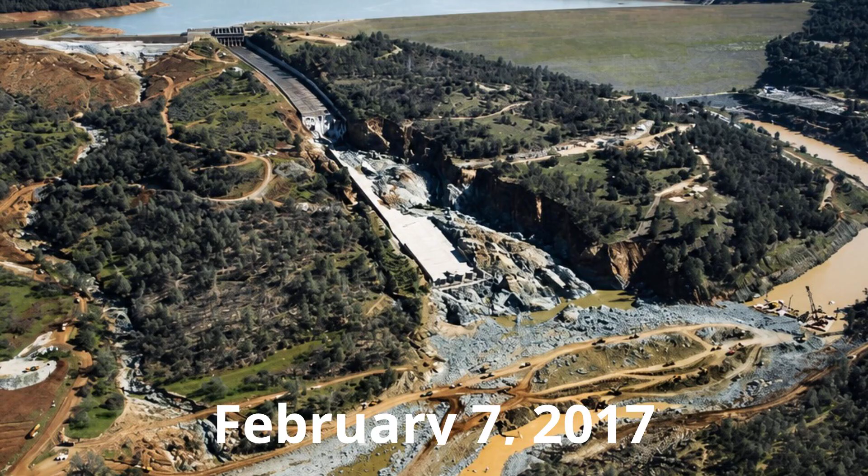February 7th, 2017, Oroville Dam, California. The tallest dam in the country is releasing water down its main spillway, exactly as designed, and the concrete tears itself apart. Not from age, not from neglect, from doing its job. 4 days later, an emergency spillway, never used once in 50 years, gets tested for the first time and starts eroding too. 188,000 people get told to leave immediately.

6 years and $1.1 billion later, engineers reopen that same spillway and call the release small. If it's fixed, why are they still this careful? I look at spillway failures and forensic reports for a living, and I want to be precise here, because the physics matters more than the panic. This wasn't a random storm breaking a dam. This was a 50-year-old design finally meeting the exact conditions it was never built to survive, and the water simply told the truth about it.

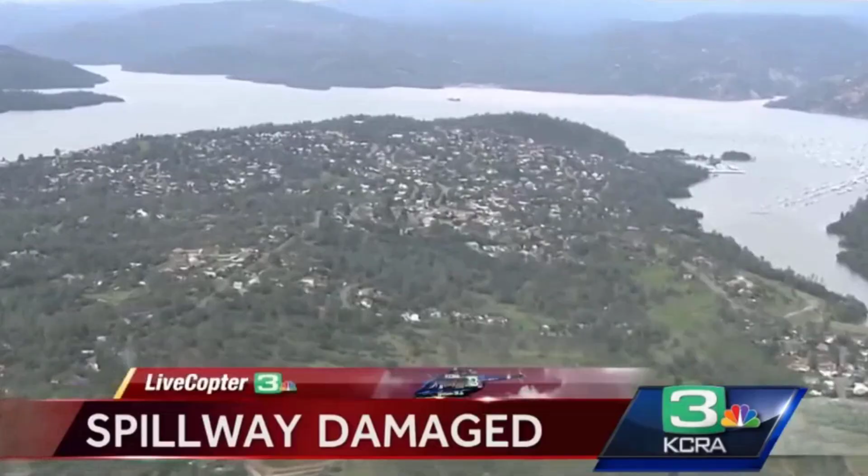Let's get the scale of this reservoir straight first, because the numbers only mean something once you understand what they're sitting on top of. Lake Oroville isn't a small local pond behind a levee. It's a working piece of the California State Water Project, and downstream from that dam sit families, farmland, fisheries, and drinking water infrastructure that stretches far beyond Butte County.

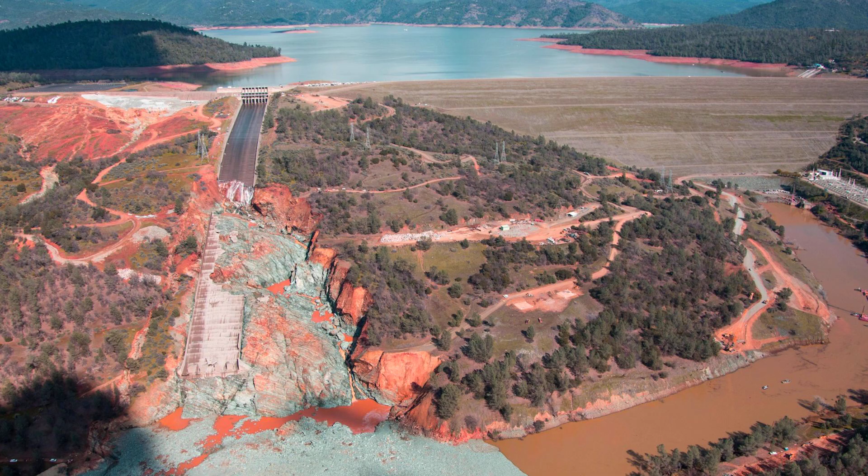When people picture a dam failing, they picture a wall breaking. That's not what happened here, and honestly, that's what makes this case more interesting, not less. The wall didn't break. The systems built to control what the wall releases broke, and that distinction is the entire story. Here's the part that bothers me professionally.

The official narrative that circulated in 2017 was simple. Unprecedented rain, overwhelmed reservoir, infrastructure did its best under extreme pressure. That's not false. It's just not the whole story, and the difference matters because "the storm was extreme" and "the storm exposed a preventable weakness" are two completely different conclusions with two completely different lessons.

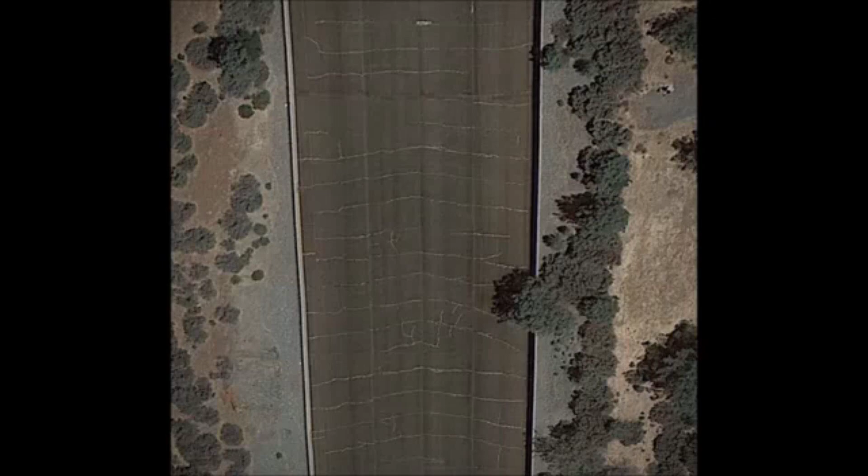In January 2018, a 6-person independent forensic team, put together at the demand of the Federal Energy Regulatory Commission, finished a 9-month investigation and released a 584-page report. I want you to sit with that number for a second. 584 pages to explain a concrete chute failing. That's not the length of a document explaining bad luck. That's the length of a document explaining a system.

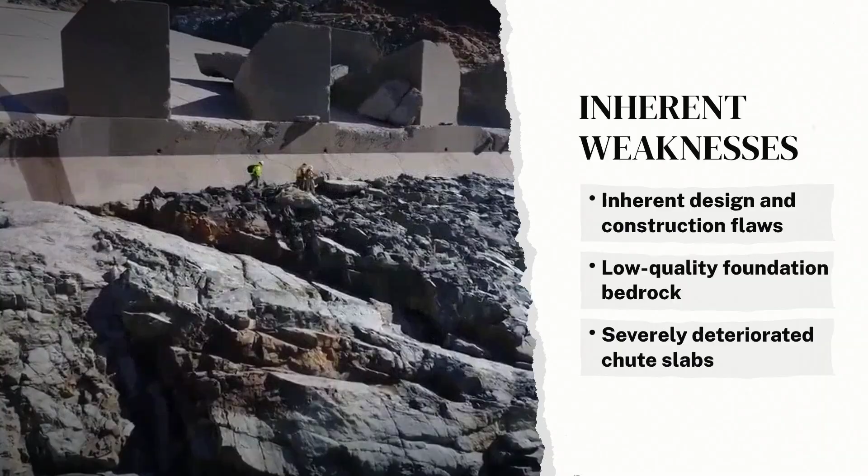Their conclusion, and I'm going to say this exactly the way they framed it: the incident was caused by a long-term systemic failure of the Department of Water Resources, regulators, and general industry practice to recognize and address inherent spillway design and construction weaknesses, poor bedrock quality, and deteriorated chute conditions. Read that again. Not an unforeseeable event, not an act of God. A failure to recognize weaknesses that already existed. That sentence is doing a lot of quiet, uncomfortable work.

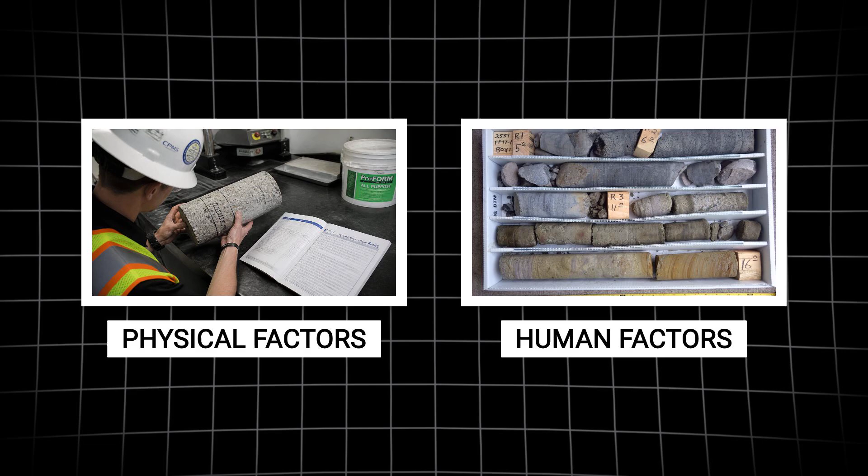Here's something else about that investigation that I think gets skipped over. This was actually the first major dam incident investigation where human factors were given the same weight as physical factors. Not an afterthought, not a paragraph at the end blaming operators, equal footing with the concrete and the bedrock. That's a meaningful choice by investigators because it means the final report isn't just a structural autopsy. It's also asking who looked at this spillway over 50 years, what they saw, and what they decided to do about it.

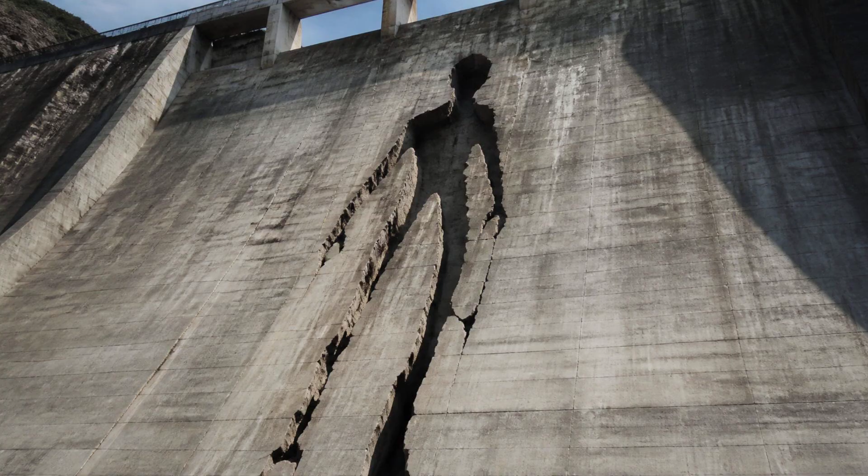When a forensic team puts human decision-making on the same level as material failure, they're telling you the failure wasn't purely physical. It was also a failure of judgment, repeated over decades by different people who each had a reasonable excuse in the moment. Okay, here's where the actual mechanism gets interesting, because this is where people usually check out, and this is exactly the part they shouldn't skip.

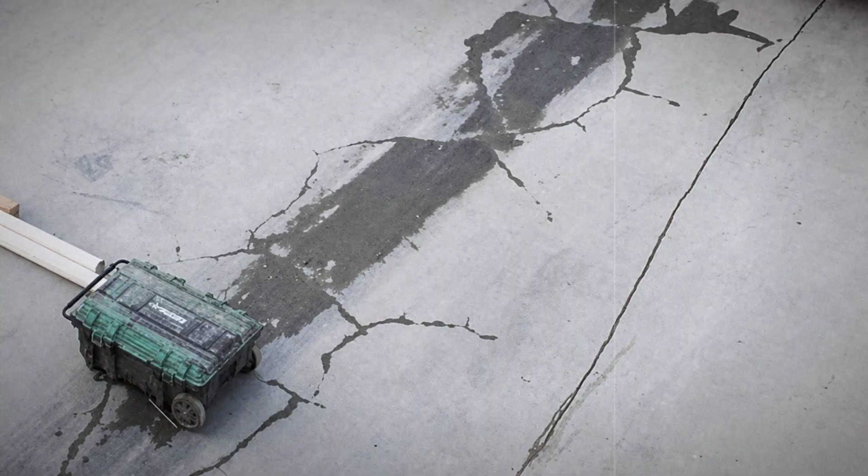The main spillway is a long concrete chute, built in sections, sitting on rock. Water runs down it fast. Under that concrete, there are cracks and joints, because there are always cracks and joints over 50 years. Water finds those cracks. It gets underneath the slab, and once water is trapped under a slab that's under enormous downward pressure from water rushing on top of it, you get uplift.

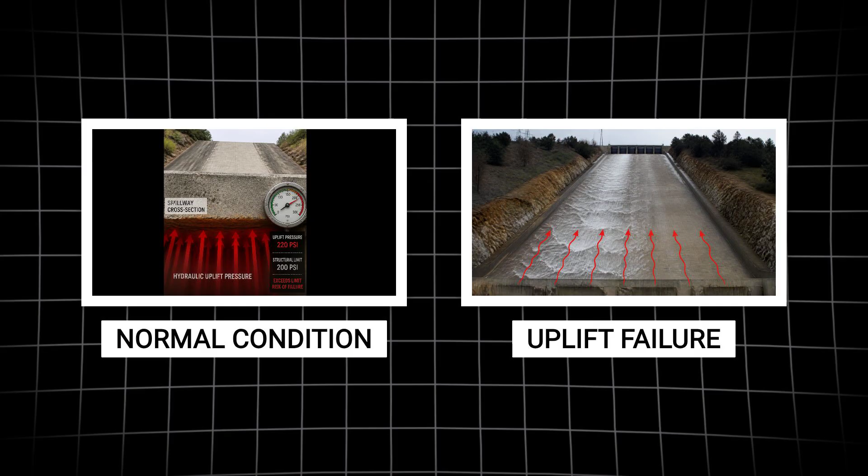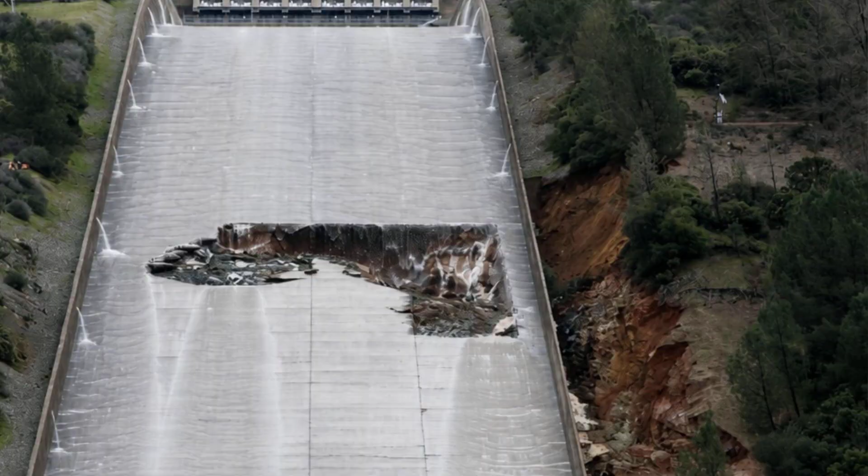The pressure pushing up from underneath can exceed the structural strength of the concrete holding it down. That's not corrosion. That's not erosion in the way people picture erosion. That's hydraulic force finding the one place the design didn't account for, and winning. Here's why that detail is not trivia.

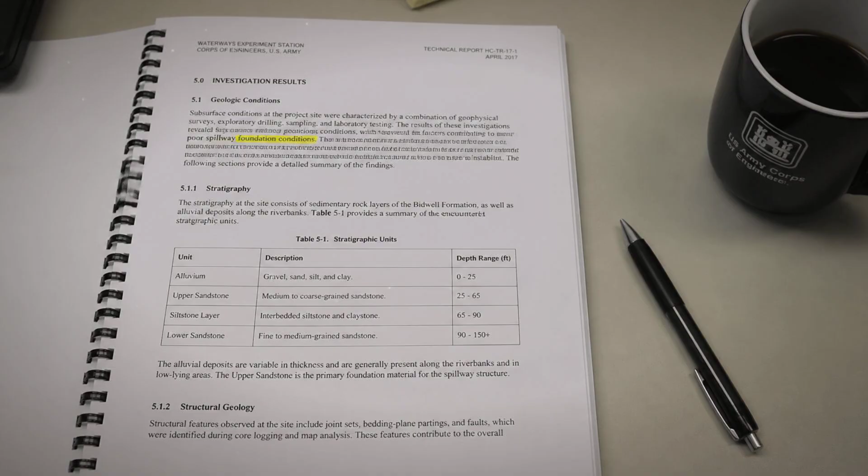Once that slab lifted, on February 7th, 2017, it exposed the rock underneath directly to the full force of the water, and the rock underneath wasn't good rock. The forensic team's language was poor spillway foundation conditions in some locations. That's a phrase built to sound clinical. What it actually means is that the ground this multi-million-dollar concrete structure was anchored into was never strong enough to handle what happened when the concrete above it failed.

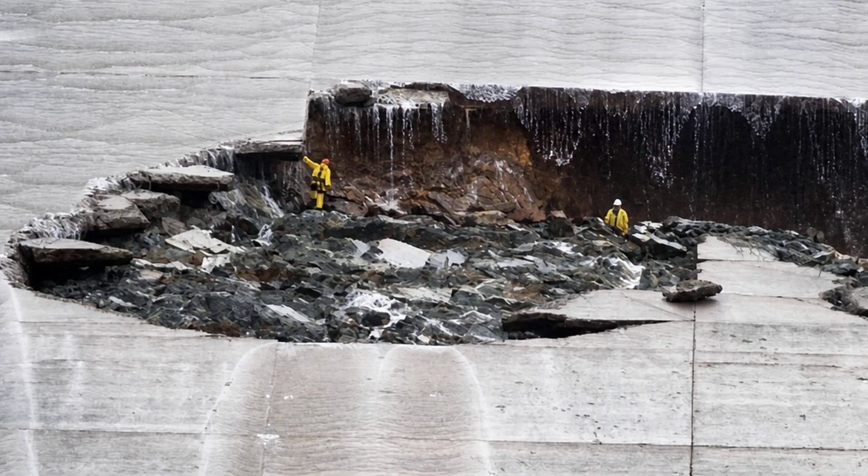The slab didn't just crack, it tore off, and it took the ground with it. And that missing ground caused more slabs to tear off. And the hole kept growing while the dam kept releasing water because it had nowhere else to send it. Picture that for a second, because this is not an abstract engineering event. You've got a chute the length of several football fields, angled steeply downhill, with tens of thousands of cubic feet of water per second thundering down it.

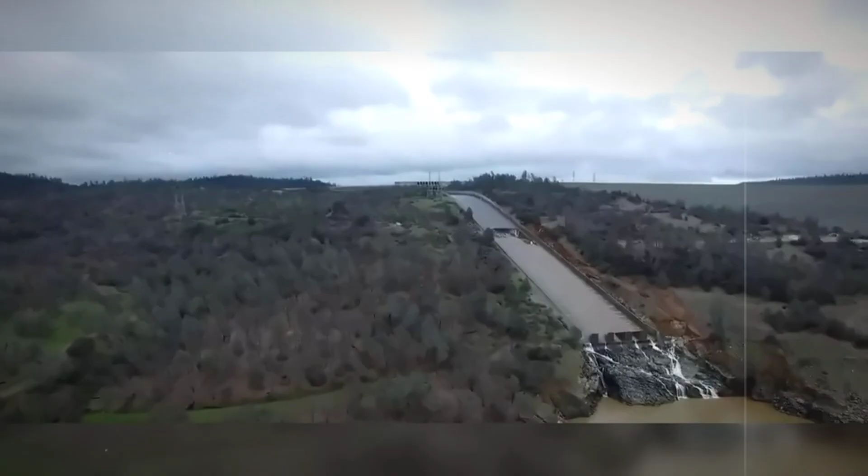Then, mid-release, a section of that concrete lifts off the ground like a manhole cover popping under pressure, and instead of smooth engineered chute underneath, there's raw exposed rock that was never meant to take a direct hit from that volume of moving water. Once that rock starts eroding, you don't get a small pothole. You get a crater growing in real time, underneath a structure that's still actively passing tens of thousands of cubic feet of water every second, because you can't just switch a flood control spillway off mid-storm.

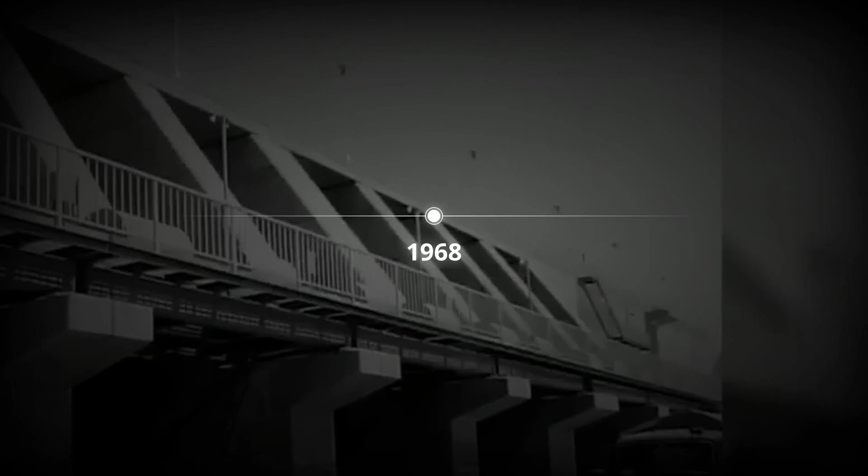I want to be fair here. Nobody in 1968, when this dam was finishing construction, was being careless on purpose. But a half-century gap between "we built this" and "this failed" is exactly the kind of gap where warning signs get buried in paperwork nobody reopens.

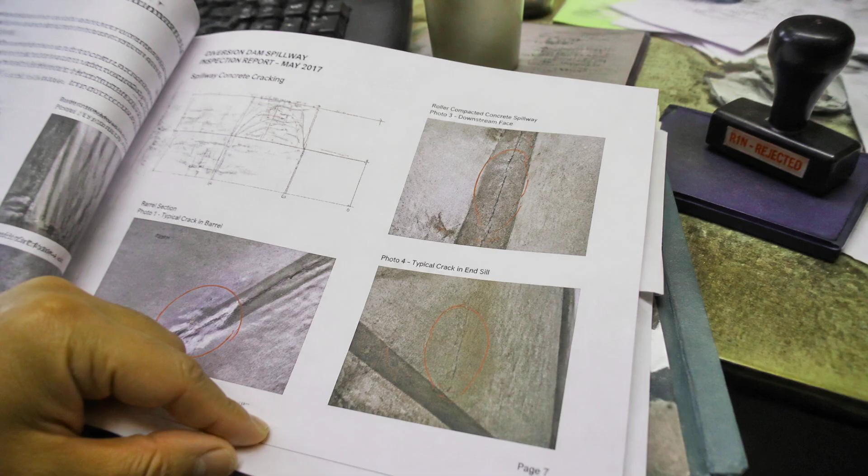I can't tell you with certainty whether prior inspections flagged chute cracking and got waved off, because that detail isn't confirmed in what's public. What I can tell you is that systemic failure to recognize is not a phrase investigators use when the problem was invisible. It's a phrase they use when the problem was visible to somebody at some point and didn't get escalated the way it should have.

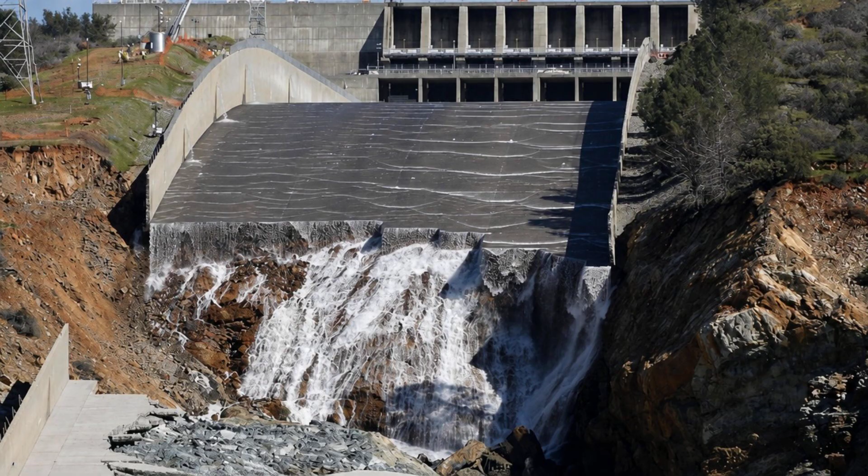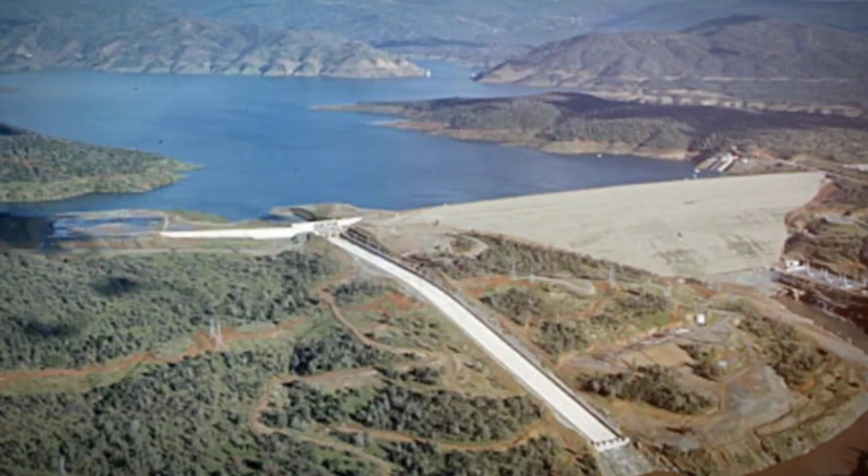Then the emergency spillway kicks in because that's what it's there for. And this is the part I find almost darkly funny in the way infrastructure failures sometimes are. This structure had existed since the dam was built and had never been used, not once. 50 years of standing there as a backup plan nobody had to test. And the very first time reality asked it to do its job, water started eroding the hillside underneath it, threatening to undercut the whole structure.

That's not a coincidence. That's untested infrastructure meeting its first real stress test and immediately showing you why untested infrastructure is a gamble, not a plan. Right there is where the evacuation order gets issued. 188,000 people in Butte, Sutter, and Yuba counties told to leave immediately because the two systems that were supposed to protect them, the main spillway and the backup spillway, were both compromised at the same time.

I don't think people fully register how rare that is. You don't usually lose your primary and your failsafe in the same 72 hours. When you do, that's not bad weather. That's a systems failure happening on two tracks at once. Think about what that evacuation actually looked like on the ground.

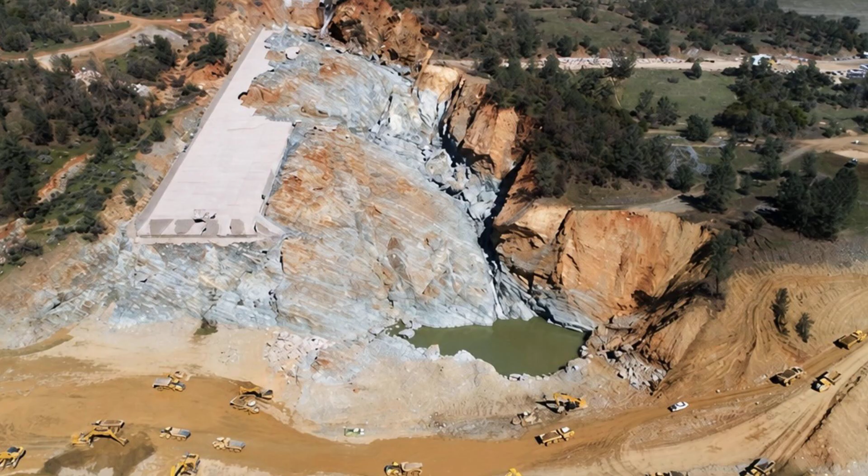Not a scheduled drill, not a slow-moving advisory, an order to leave right now for entire counties, because the people running one of the tallest dams in the country could not guarantee in that moment that the hillside below the emergency spillway would hold. That's the kind of decision water managers dread making, because it means admitting in public, in real time, that the backup plan is also in trouble.

I've seen agencies delay that kind of announcement to avoid panic. To their credit, this time they didn't. But the fact that the call had to be made at all tells you the margin for error had already run out.

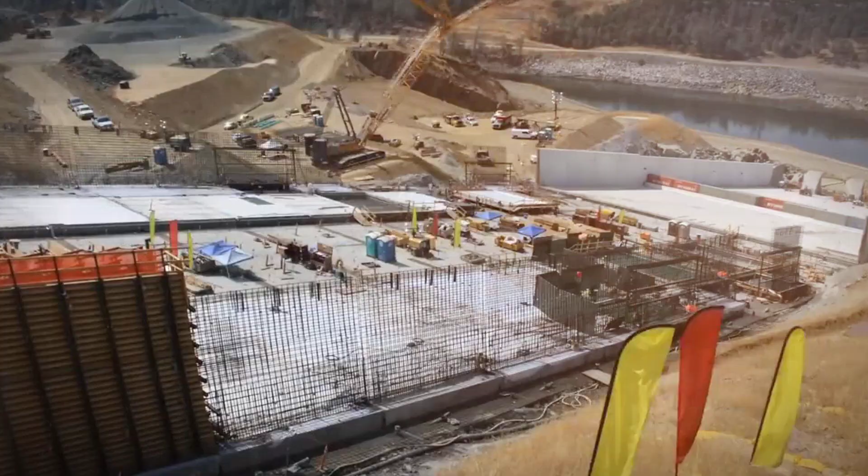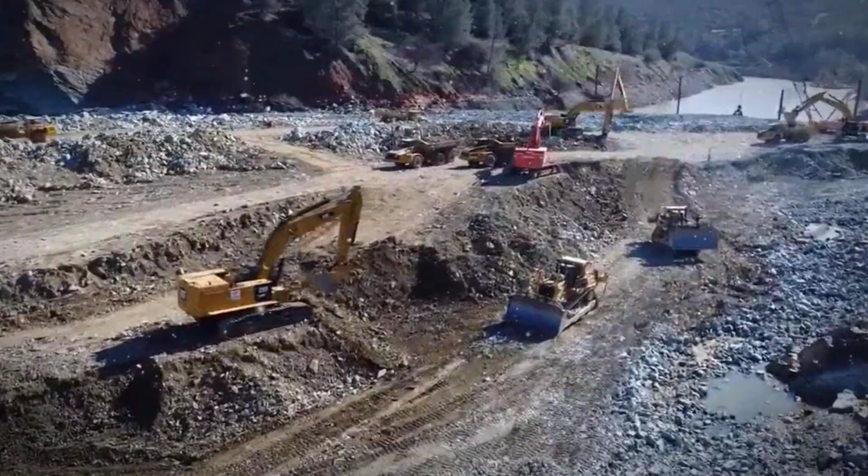Now let's talk about the money, because the money tells you almost as much as the concrete does. The Department of Water Resources awarded the repair contract to Kiewit Corporation in April of 2017, based on an estimated bid of $275 million. By the time the work was actually done, that portion alone had climbed to $630 million. DWR's own internal costs rose to $310 million. On top of that, $160 million went to emergency response, sediment removal, temporary power lines, the stuff you don't plan for because you didn't expect to need it.

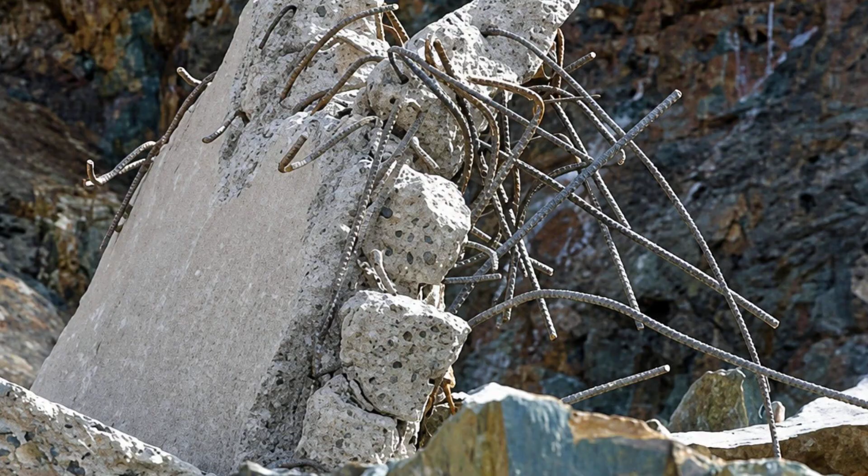Total repair cost, $1.1 billion, finished in November of 2018. Here's the reversal people miss. That cost didn't balloon because contractors were padding invoices. It ballooned because every time crews opened up another section of the old structure, they found more of the original construction was worse than presumed. The rising price tag wasn't a symptom of waste. It was the truth about a 50-year-old design surfacing in real time, one exposed section at a time.

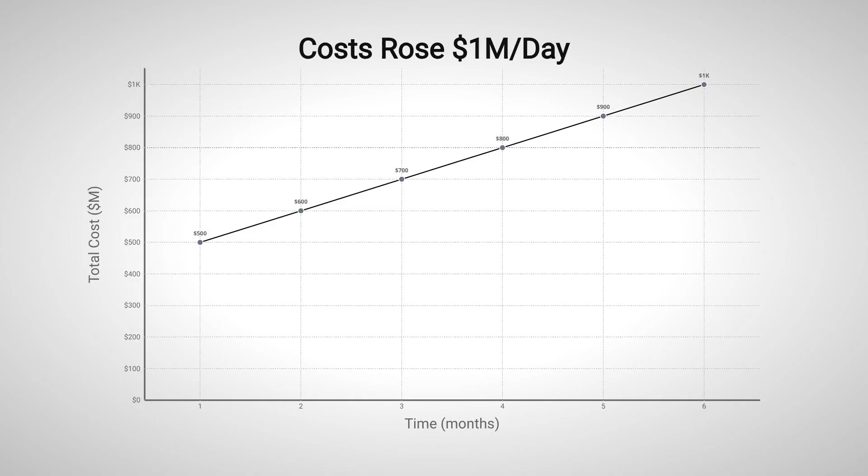Reporting at the time actually tracked this. The total cost climbed by roughly $1 million a day between April 2017 and mid-2018. That's not a number you get from overspending. That's a number you get from discovering, section by section, that the original problem was bigger than anyone wanted to admit on day one. And who pays for that?

FEMA was slated to cover 75%. The rest falls on state water project customer agencies, including the Metropolitan Water District of Southern California, meaning ratepayers hundreds of miles away, who never set foot near this dam, are covering part of the bill for a design flaw from the 1960s. That's the quiet part of infrastructure failure. It doesn't just cost the place where it happened, it gets spread across everyone downstream of the invoice.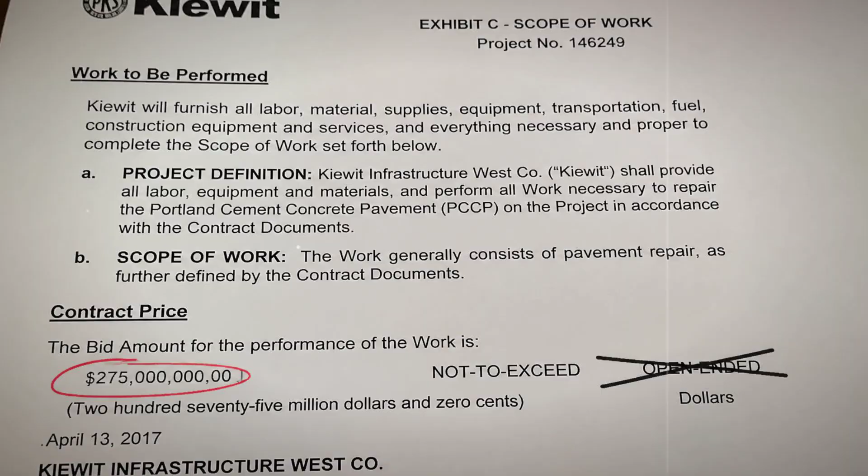I want to flag one more thing about that contract because procurement details are usually where the boring stuff hides the real story. Kiewit didn't get handed an open-ended check. They bid $275 million for a defined scope of work, and the scope kept changing because the site kept revealing more damage than the original assessment accounted for. That's not the same thing as a contractor exploiting a crisis.

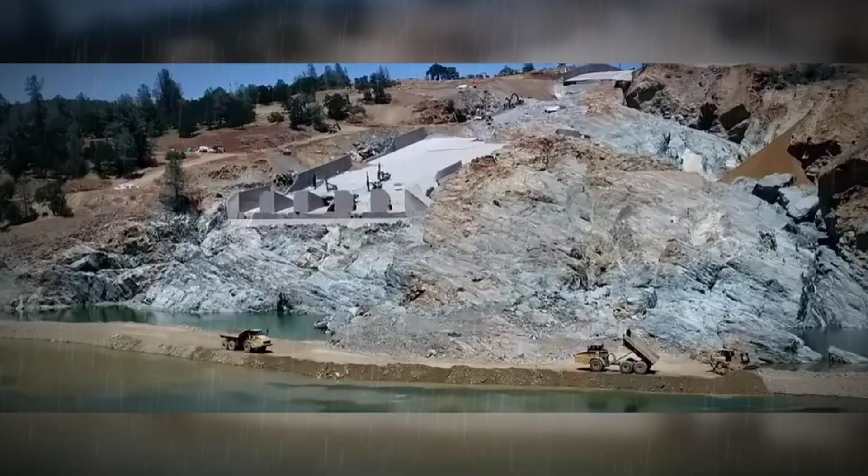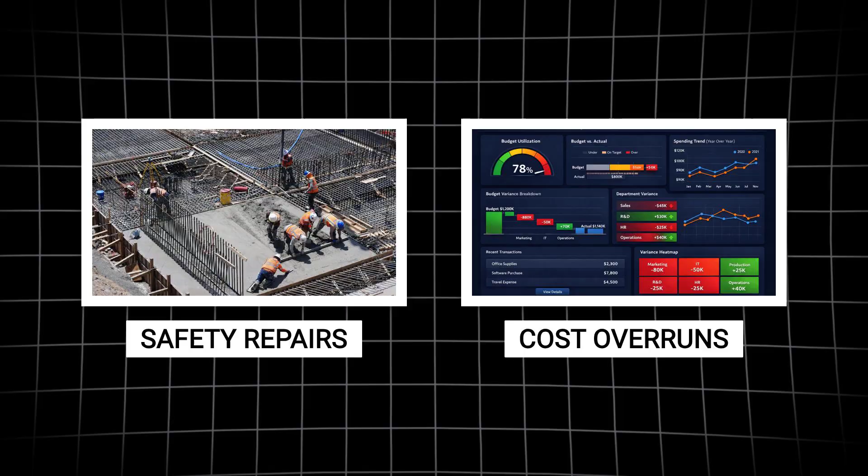That's what happens when the diagnosis phase and the construction phase get compressed together under emergency conditions, because you can't leave a damaged spillway unrepaired through another rainy season while you take your time studying it. Emergency timelines are good for public safety and terrible for cost control. And this project is a textbook case of exactly that tension.

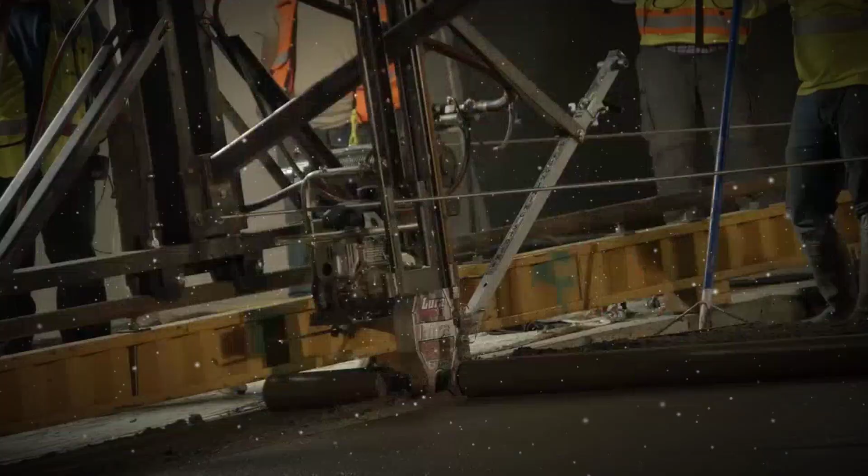Let's go back to the emergency spillway for a second, because there's a second layer here that I think is the most honest tell in the entire story. After 2017, DWR reinforced that emergency spillway with concrete. Good, necessary. But here's the thing that should make you pause. Even after the reinforcement, water managers still don't treat it as something safe to rely on for regular use. Not confidently, not routinely. Think about what that actually means.

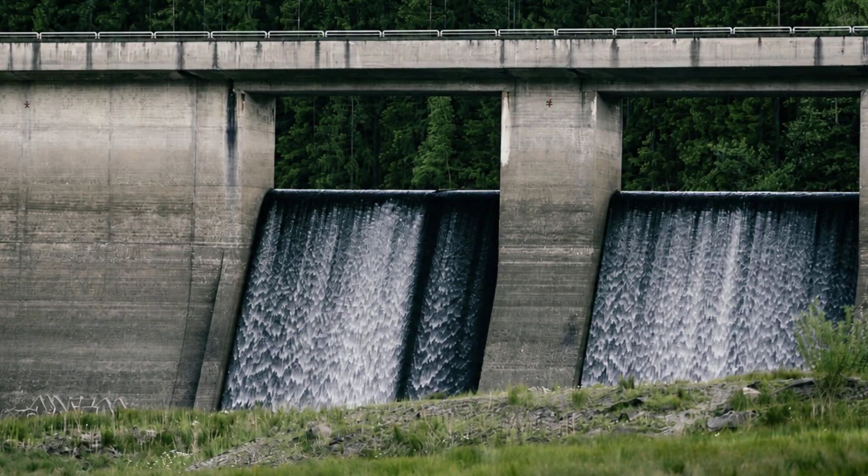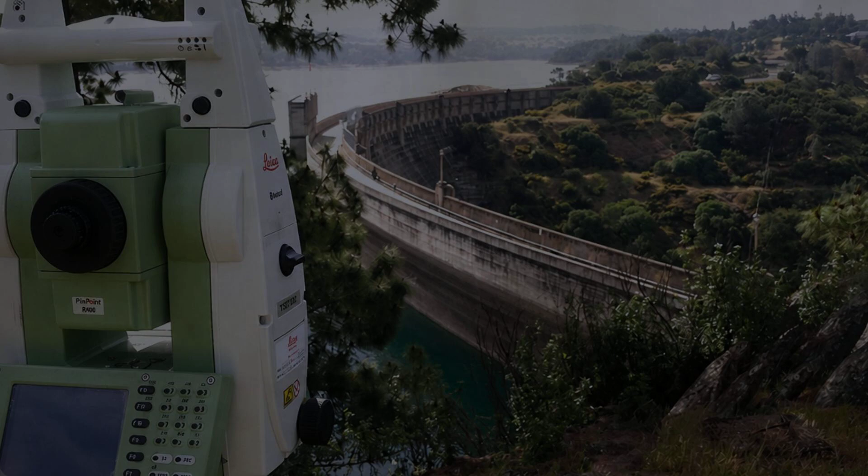You spent money hardening a backup system, and the professional posture afterward is still, we'd rather not use this if we can avoid it. That's not caution for caution's sake. That's an implicit admission that the reinforcement improved the odds without eliminating the underlying risk. If they were confident it was solved, they'd use it like a normal spillway. They don't. Now here's where the monitoring story gets genuinely uncomfortable, and I don't think enough people connect this dot.

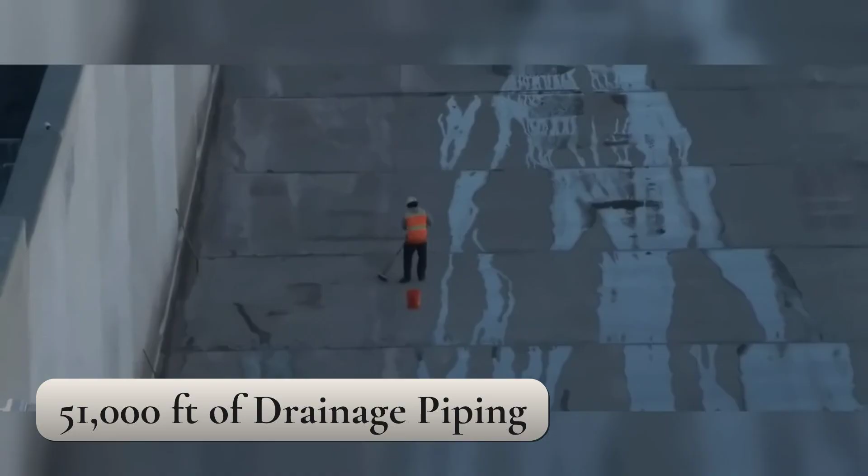As part of the rebuild, DWR installed new instrumentation throughout the reconstructed spillway, specifically to monitor pressure, drainage, and structural movement while it's operating. They also now inspect 51,000 feet of drainage piping supporting the spillway on an annual basis. Sit with that for a second. 51,000 feet of piping, checked every year, plus live pressure and movement sensors, running under a structure that operated for decades with nothing like this in place.

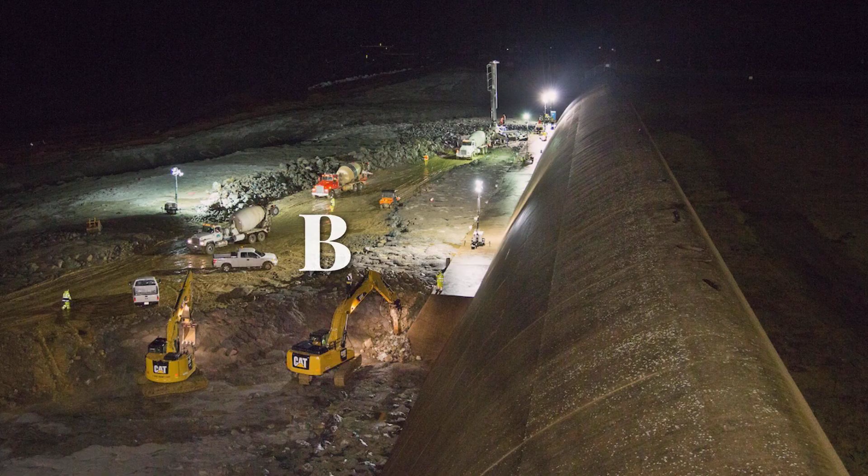The fact that they needed to add all of this after the failure tells you plainly that the original spillway ran essentially blind for 50 years. Nobody was watching the pressure under that slab in real time back in 2017. That's exactly the kind of data gap that turns a slow building weakness into a sudden catastrophic one, because by the time you can see the problem with your eyes, the water's already won.

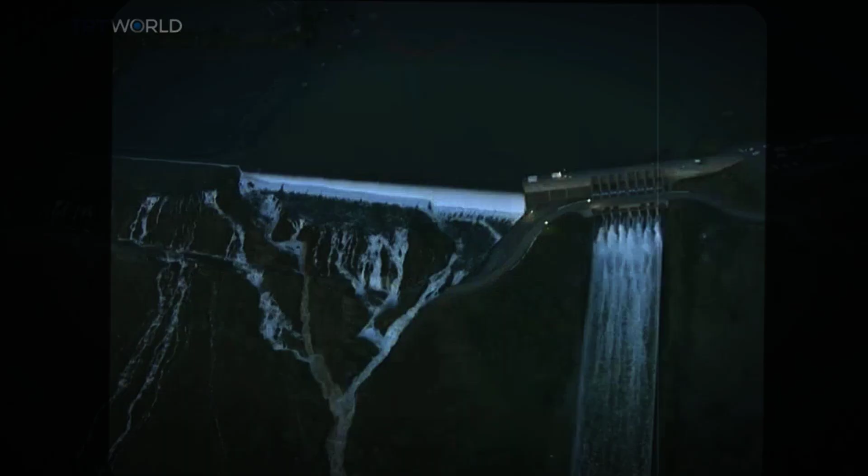And I want to be clear about something here, because this is where a lot of infrastructure coverage gets lazy. None of this instrumentation is exotic technology. Pressure sensors, drainage monitoring, structural movement gauges, this is standard practice at modern dam sites, not some experimental fix.

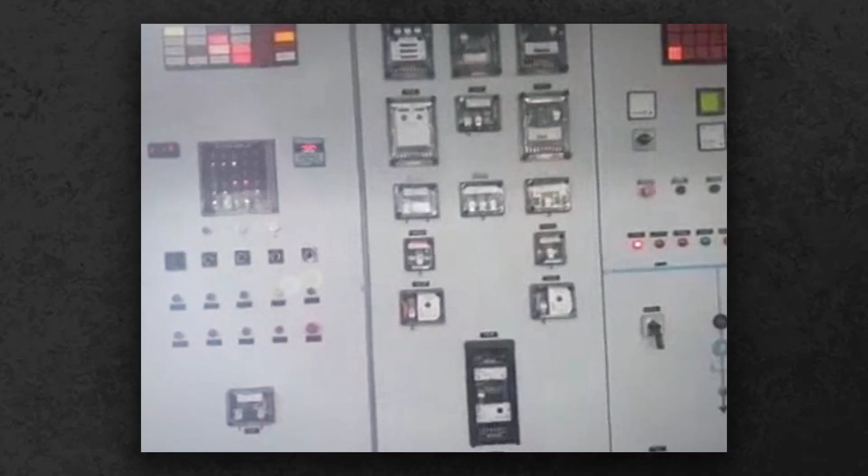The legitimate question isn't whether the technology works. It clearly does, and it's giving engineers real-time information they never had before. The question is why a structure of this scale, feeding a system that serves millions of people, went half a century without it. That's not a technology fit problem, that's a technology adoption problem, and it's a much more damning one, because it means the tools to catch this existed the whole time. They just weren't installed until after the concrete had already torn itself apart.

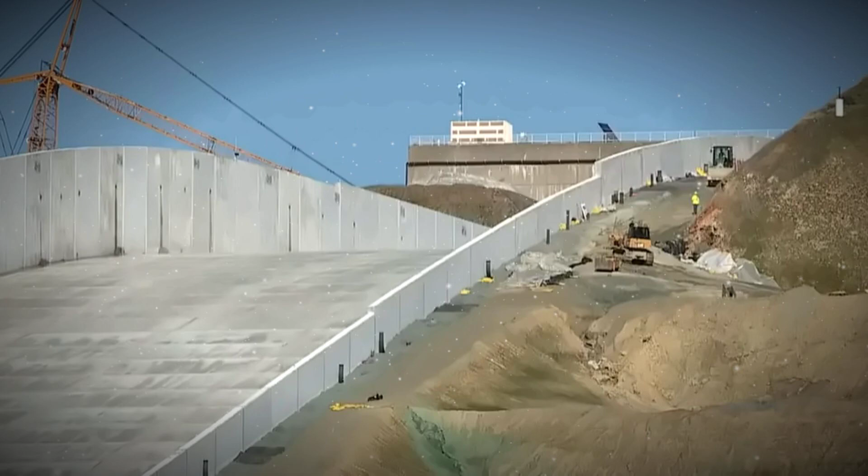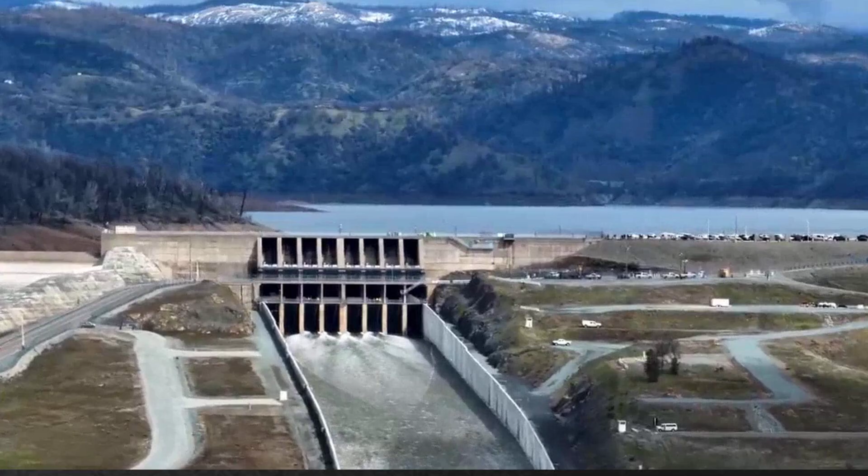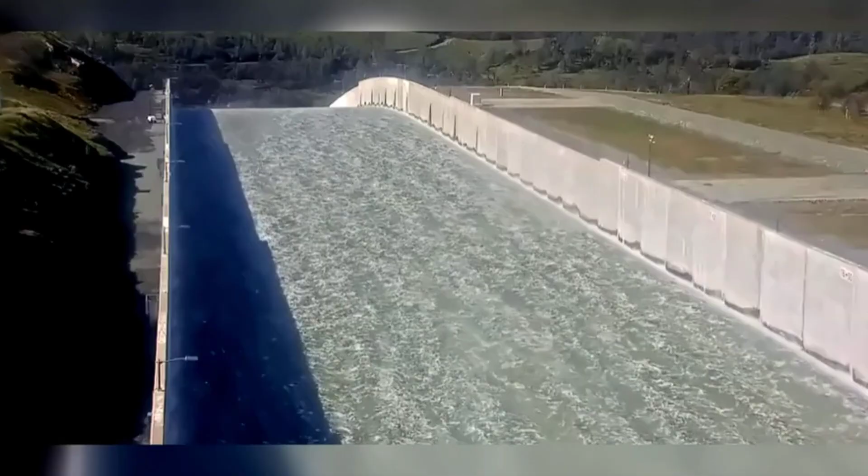Here's a detail that I think undercuts the "it's fixed now" narrative more than anything else in this case, and it's recent. The main spillway reopened for a small test release on April 2nd, 2019. Then it sat, completely unused, for 4 full years. 4 years of total silence on that structure. Then, on March 10th, 2023, after a winter of heavy storms, DWR opened it again for flood control, for the first time since 2019, starting at 15,000 cubic feet per second. 15,000 out of a spillway rated to handle 270,000, and officials on record called that a relatively small release.

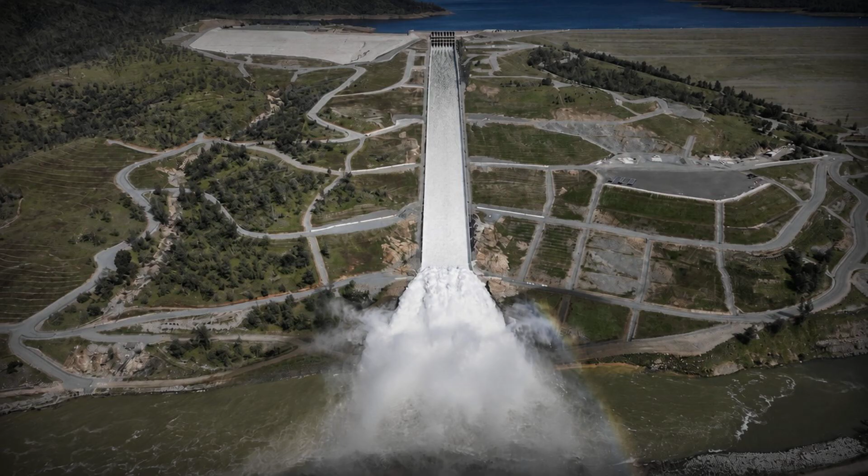I want you to notice the caution in that language, because caution from engineers who just spent over $1 billion rebuilding a structure is not neutral. It's data. Through the rest of 2023, DWR ended up releasing more than 2.37 million acre-feet through that spillway, about 67% of the entire capacity of Lake Oroville, with flows reaching 36,000 cubic feet per second that spring. And officially, the spillway continued to perform and operate as designed. Fine, I believe that. But here's the part that quietly complicates the reassurance.

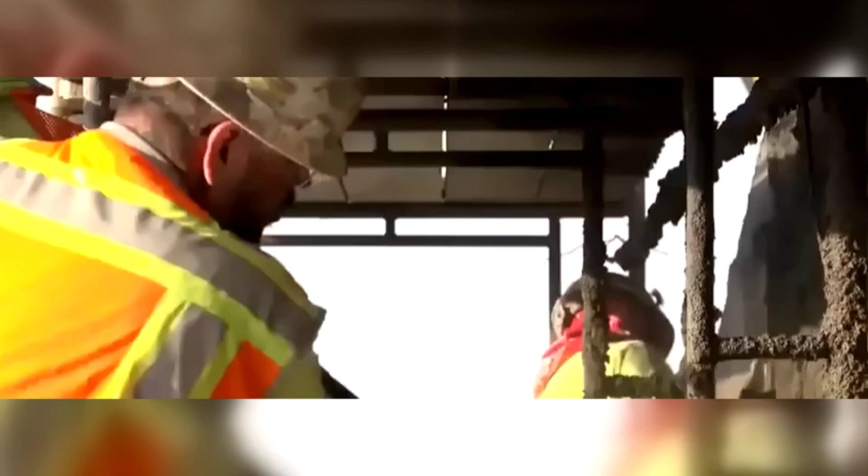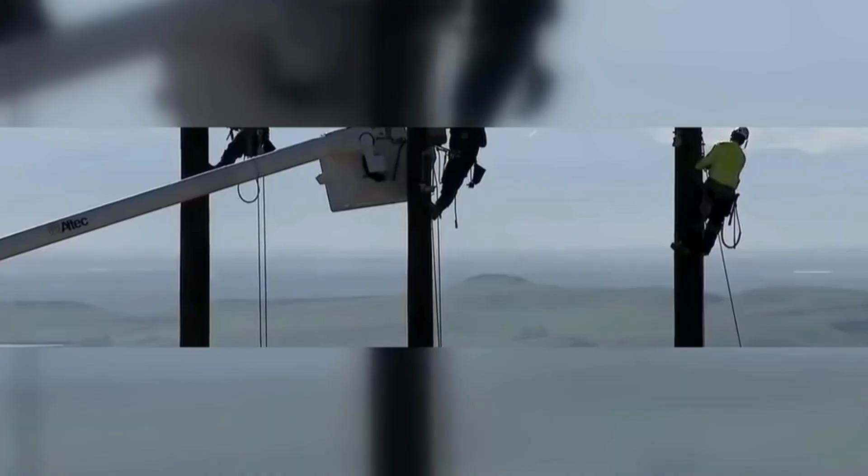Afterward, DWR still had to go back in and perform new concrete and sealant repairs, roughly 500 square feet of it, on a contract handled by Syblon Reed, under 0.1% of the total spillway surface. Sure, that's small, but small is not zero, and the agency's own explanation was that periodic repairs are simply expected because of temperature swings, sun exposure, and use. This is the reversal I want you to actually absorb, because it's the whole case in miniature. Passing 2/3 of the lake's capacity through the rebuilt spillway produced new cracking that needed patching within the same year.

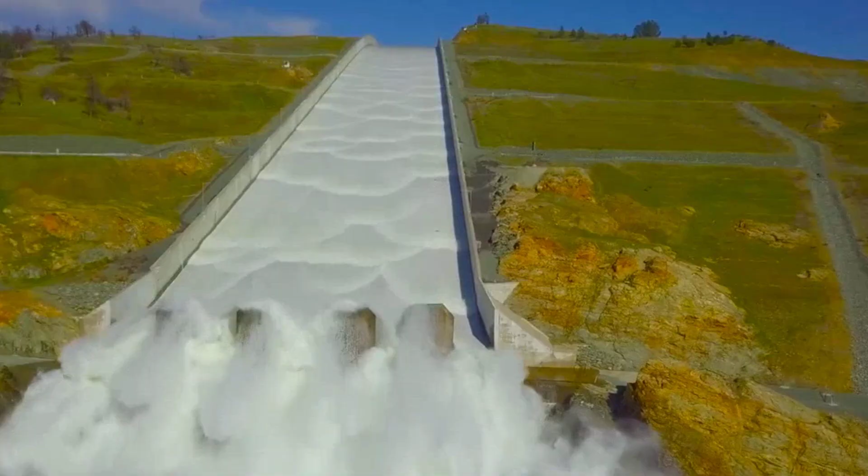That doesn't mean the fix failed. It means the fix reduced the failure mode without eliminating the underlying physics. Concrete under sun, under seasonal temperature swings, under the force of moving water, is always going to need maintenance. You didn't engineer that variable away, you engineered it down. That's an important distinction, and it's one the "it's fixed" headlines never make.

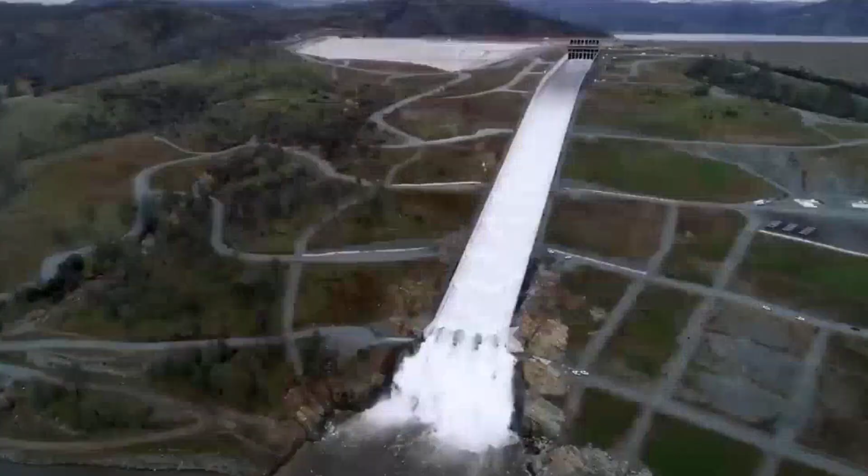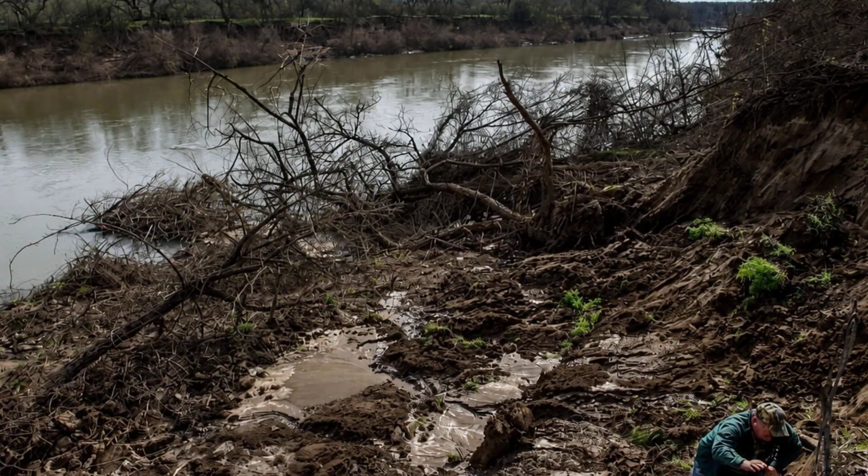I also want to be fair about something, because skepticism without fairness turns into fear-mongering, and I'm not interested in that. The rebuilt spillway is genuinely better than the original. It's anchored differently into the bedrock. It has drainage systems the old one didn't have. It has instrumentation the old one never had. Engineers aren't lying when they say it performed as designed in 2023. What I'm saying is narrower and, I think, more useful. Performing as designed under 67% capacity is not the same claim as being permanently solved. Those are two different sentences, and only one of them is actually being made by the people who work on this dam every day.

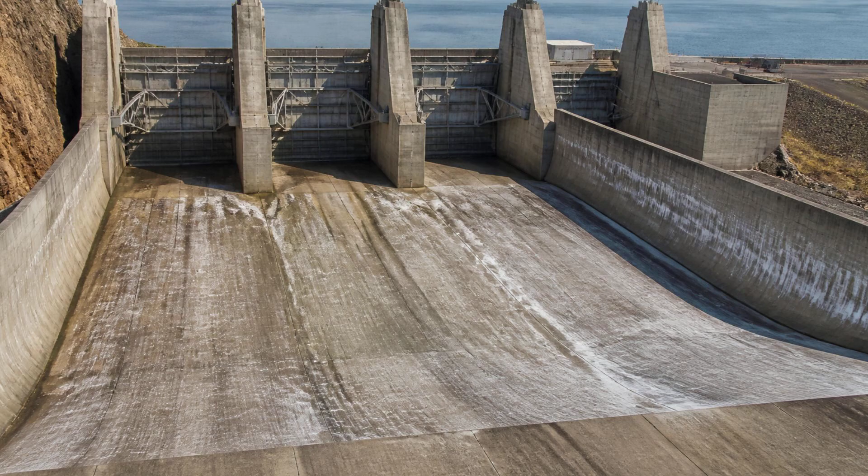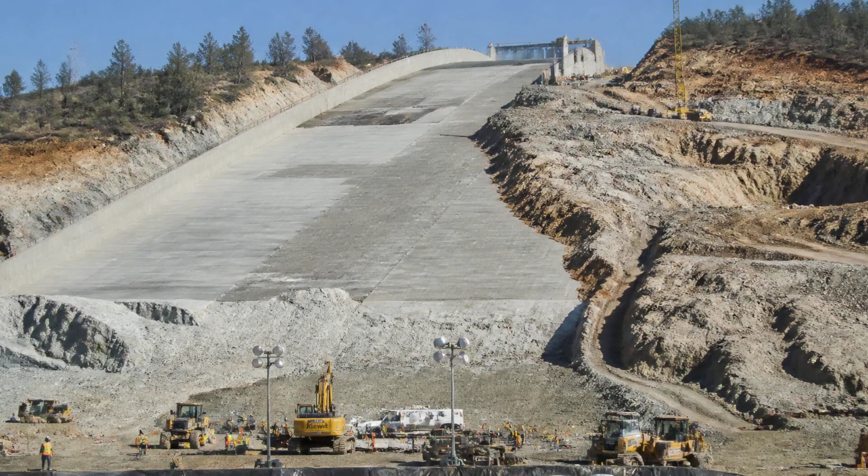Let's talk about what got washed downstream, because this part doesn't get nearly enough attention in the retellings that focus only on the evacuation. When that hillside eroded below the emergency spillway, and when the main chute tore apart, all of that material, tons of sediment, went straight into the Feather River. That river is salmon and steelhead habitat, species that were already blocked from a huge amount of their natural spawning grounds by the existence of the dam itself. So you have a population already squeezed by the infrastructure, and then a sediment plume smothers additional miles of the habitat they had left. This isn't a side note. This is the ecological cost of an infrastructure failure that gets almost no airtime compared to the human evacuation story, and it's arguably permanent in a way the concrete repairs aren't.

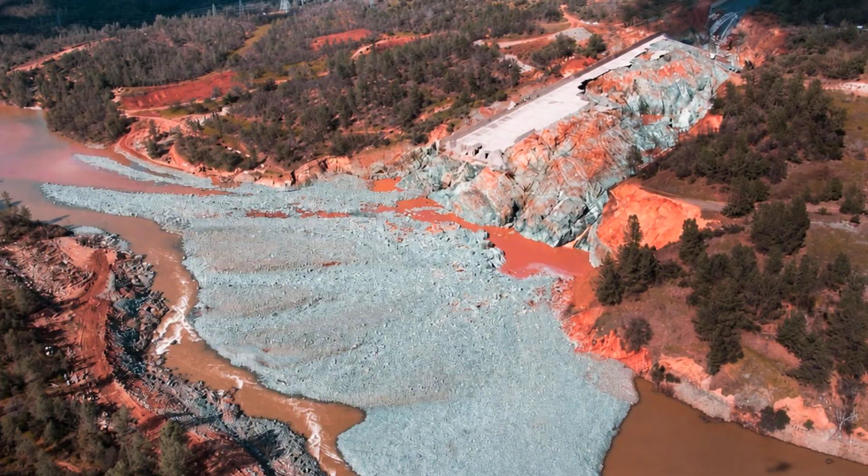Here's why that matters biologically, and I'll keep it simple. Salmon and steelhead need clean gravel beds to spawn in, places where oxygenated water can actually reach their eggs. Bury that gravel under a fresh layer of eroded sediment, and you don't just inconvenience a fish population for a season, you can knock out a spawning class entirely, because the eggs laid in smothered gravel don't get the oxygen exchange they need to survive. Concrete gets repaired on a construction timeline. A damaged spawning run recovers on a biological timeline, and those two timelines are not the same length. Nobody in the "spillway performed as designed" press releases is talking about which one of those clocks actually matters more downstream.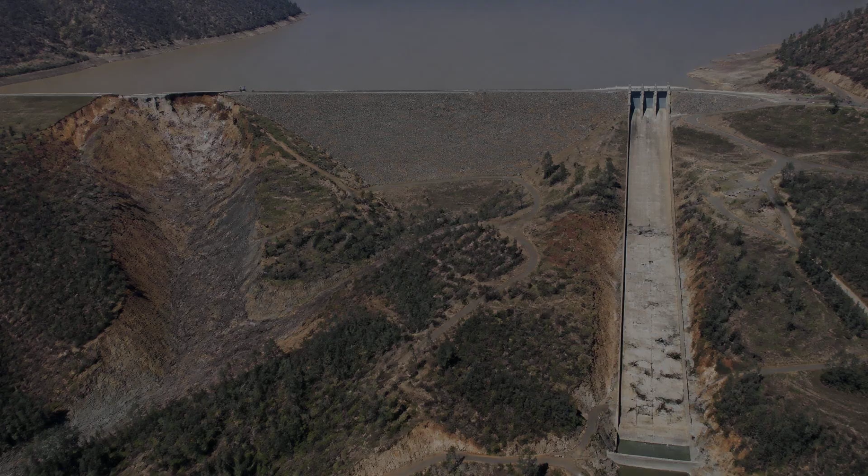Here's the bigger frame I want to leave you with, because Oroville isn't actually a story about one weird dam. Oroville is one of 15,498 dams across the country currently classified as high hazard potential, which is roughly 17% of every cataloged dam in America. High hazard doesn't mean the dam is in bad condition. It means that if it fails, human life and property downstream are directly at risk.

Oroville shares that classification with thousands of other structures you've never heard of, most of which are also decades old, most of which were also designed under assumptions about rainfall and bedrock that were reasonable when they were built and are increasingly not reasonable now.

And that brings me to the climate piece, because I think this is the most uncomfortable thread in the entire case. Researchers at Scripps Institution of Oceanography and the University of Colorado studied the specific atmospheric river sequence that dumped water into Lake Oroville right before the 2017 failure.

For anyone unfamiliar, an atmospheric river is basically a long, narrow band in the sky carrying enormous amounts of water vapor from the Pacific straight into the mountains, and when a series of them line up back to back, they can dump feet of rain and snowmelt into a single watershed in a matter of days. That's exactly what happened heading into February 2017.

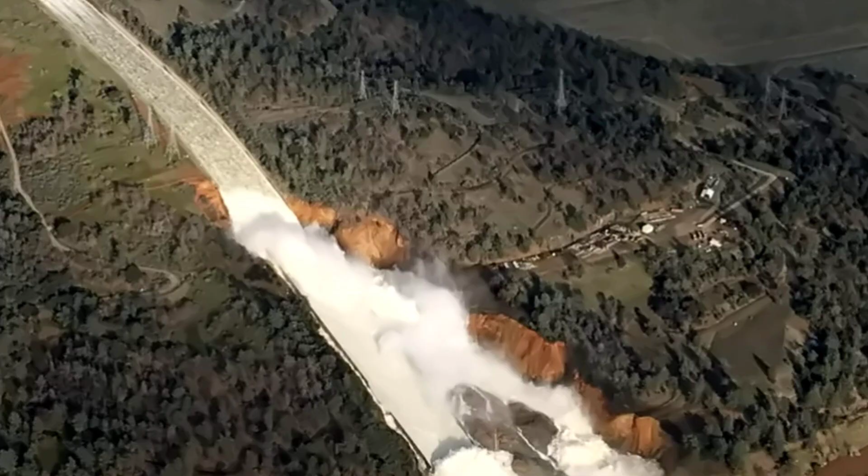Their finding, in plain language: a warmer climate is expected to produce more intense versions of exactly that kind of storm event, the kind that overwhelms a reservoir faster than its infrastructure was designed to handle. That's not a political statement, that's a hydrology statement. The design assumptions baked into a 1960s spillway were built around the storms of that era. The storms aren't staying in that era.

So here's what a genuinely different approach would have looked like if we're talking about professional standard of care instead of crisis response. You don't wait until a chute tears itself apart to discover your foundation rock is inadequate. You instrument the structure before the failure, not after. You treat drainage inspection as a routine baseline, not a reactive upgrade you install once people have already been evacuated.

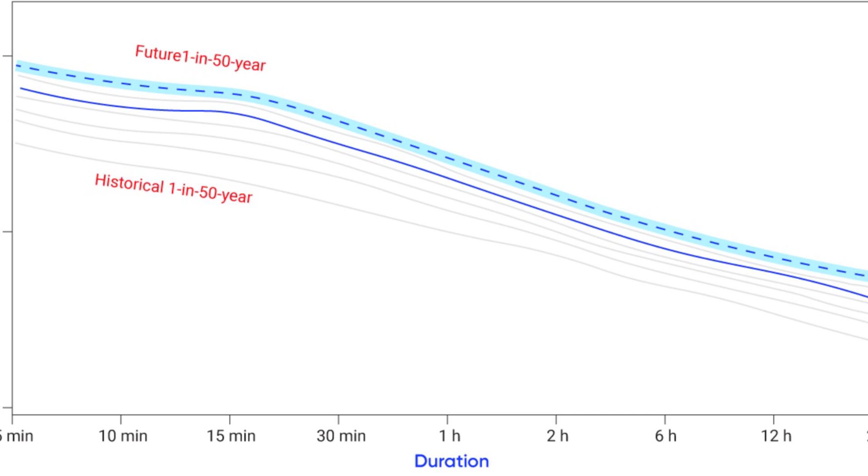You reassess a spillway's design margins against current climate data, not the rainfall assumptions from the year it was poured. None of that is exotic engineering. It's just monitoring before disaster instead of monitoring after it, and that's the exact sequence that got reversed here. That's the standard of care line I keep coming back to in cases like this one.

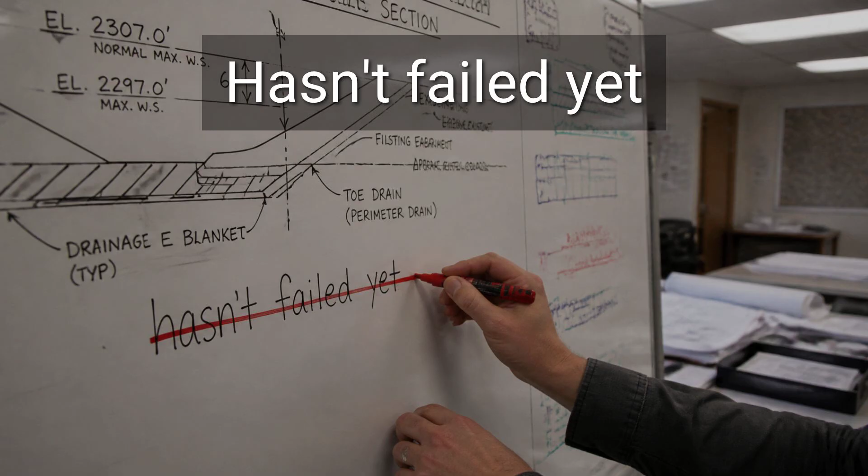A competent water management plan doesn't treat "it hasn't failed yet" as evidence that it won't. It treats age, unmonitored conditions, and known bedrock uncertainty as active risk factors that need data on a schedule, whether or not anything looks wrong on the surface. The moment you're relying on visual inspection alone for a structure moving hundreds of thousands of cubic feet of water per second, you've already accepted that you'll find out about the next problem after it starts, not before.

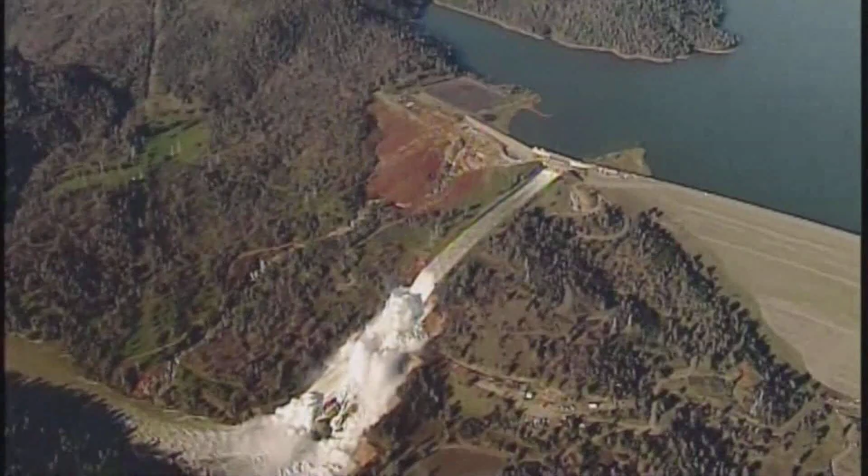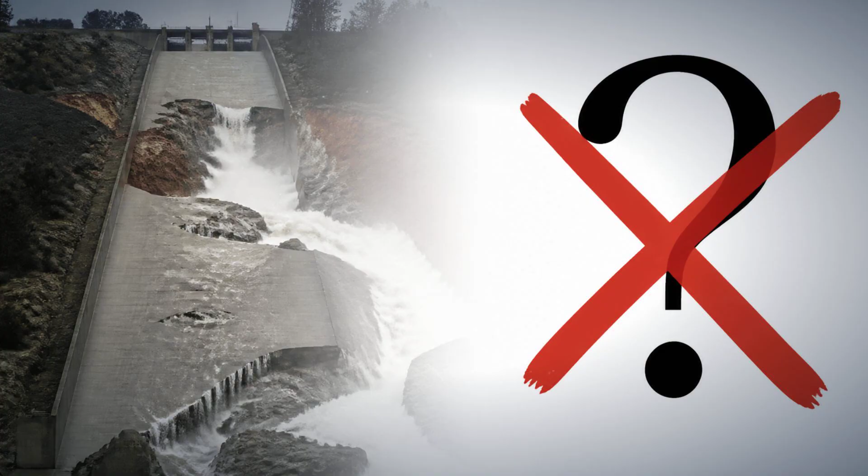I keep coming back to one thing every time I read through this case, and it's this. The emergency spillway was there for 50 years as a promise, untested, and the very first time it had to keep that promise, it started failing too. That's not an unlucky coincidence. That's what happens when your backup plan has never once been asked to actually perform.

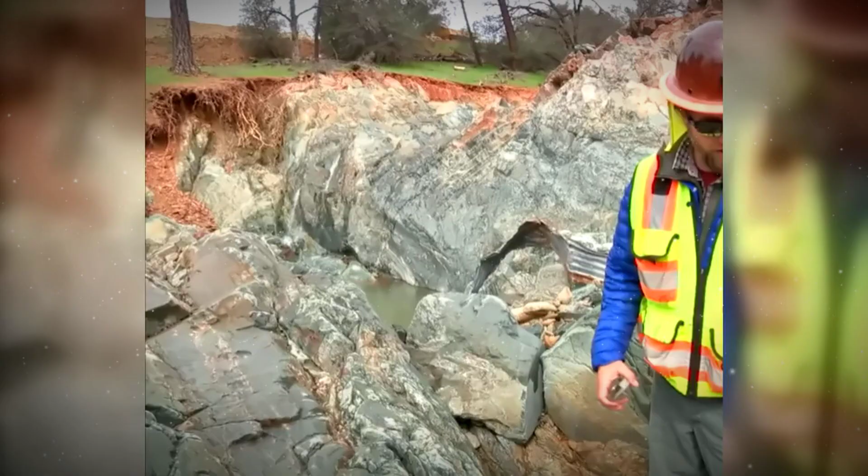So let's be honest about what actually happened here, because I think the tidy version people repeat, unprecedented storm, dam held, crisis averted, lets the real lesson slip right past everyone. This was never a story about one catastrophic storm. It was a 50-year-old design meeting bedrock it was never suited to, discovered only because the water finally asked the question directly. $1.1 billion didn't buy a different foundation.

It bought better concrete, better anchoring, and a lot more sensors watching a structure that used to run essentially blind. That's real progress. It is not the same thing as removing the risk. The bedrock underneath that spillway is still the same bedrock. The climate sending storms at that reservoir is sending bigger ones, not smaller ones.

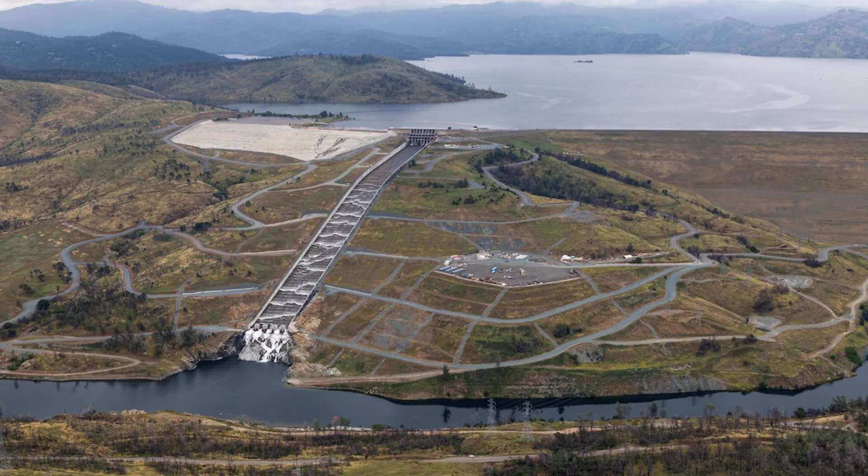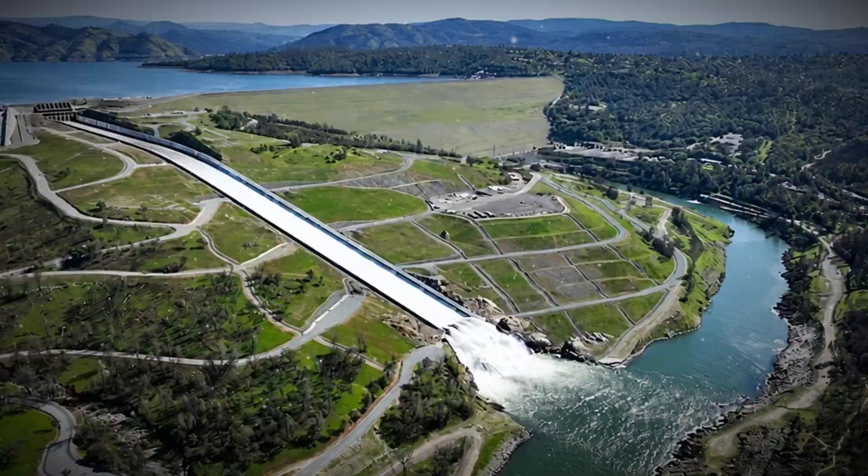And the emergency spillway that engineers reinforced with concrete is still standing exactly where it always stood, still treated, even now, as something you'd rather not have to lean on. They didn't fix the dam. They started watching it properly. And watching closely is not the same thing as having solved the problem it's watching for.